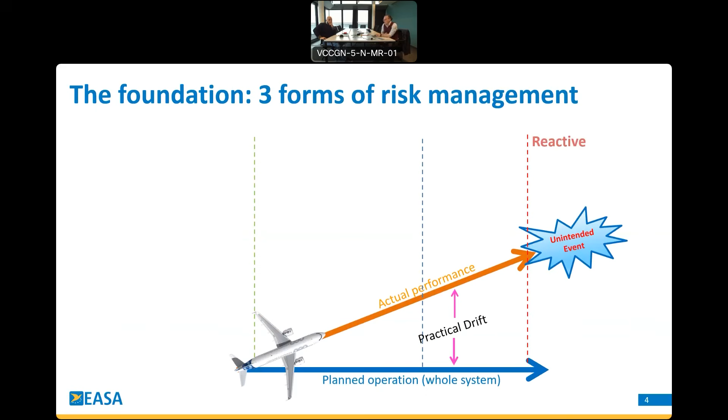One form of risk management is the reactive one. The reactive manner is to prevent reoccurrence or mitigate severity of safety events. Typically we learn after an accident, where we look at the consequences and the contributing and causal factors of the accident.

Then there is a proactive way to manage risk, where we identify hazard mechanisms and threats beforehand and establish control measures to prevent initial occurrence from happening. The third form of risk management is the predictive one, making an attempt to anticipate future exposure based on performance, data, and knowledge.

You can see, for example, the blue arrow could represent compliance-based safety, while the amber arrow, the actual performance, is the performance-based safety.

From a historical perspective, the reactive manner was the one used until the late 1940s in aviation, where we applied the principle of fly, fix, fly. The proactive manner came alive during the mid-50s, when we realized we needed better certification standards for jet aeroplanes. System safety was introduced in the late 50s and allowed two big achievements for humanity: sending man on the moon with the Mercury, Gemini, and Apollo programs, and in aviation, system safety allowed one of the best aeroplanes, the Concorde, one of the first aeroplanes to use system safety.

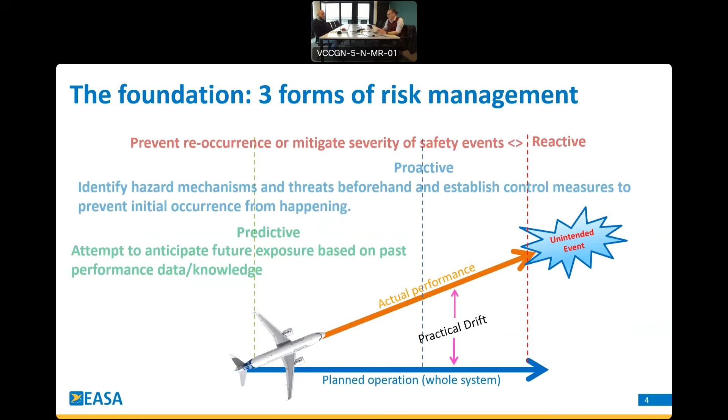You also have a very important document to implement, the AMC 20-8, currently at its latest version 20-8A. Another piece of regulation important for occurrence reporting is the 376/2014, linked to the implementing rule 2015-1018, which gives you the list of reportable occurrences. As an operator, what matters to you is Annex 1 to these implementing rules, on occurrences related to the operation of the aircraft.

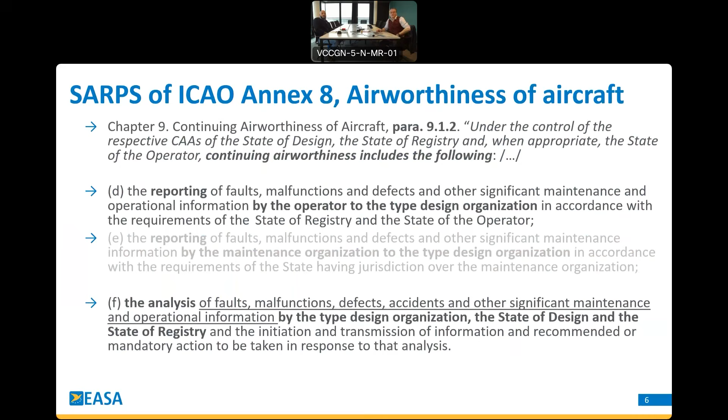Let's have an example now on the flow of reports and data reflow in the European Union. We have an important piece of the centric reporting system in Europe: the ECR, the European Central Repository.

We will be introducing EASA as competent authority number 1, an EU member state as competent authority number 2, and as an example for today, an EU Part 145 maintenance organization. We will also have a design approval holder, EASA 21J, an EASA AOC under oversight of EASA for today, and also an EASA CAMO.

So should a reportable occurrence happen, the AOC will first have to report when assessed as a reportable occurrence. It will report, because it's an EASA AOC, to its competent authority, here EASA. It will also have to liaise and report to the EASA CAMO.

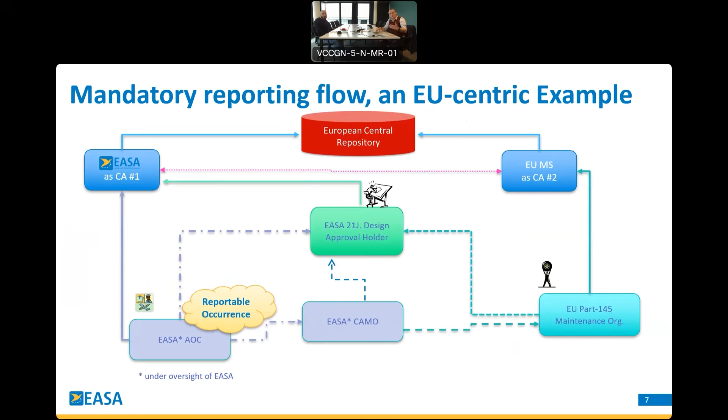Then you have a second kind of occurrences: the regulatory list-determined occurrences, which must be reported by an AOC and are related to the safety of the product or the safety of aircraft operation. Typically you will find them in the AMC 20-8, and especially, as mentioned before, in the Implementing Rule 2015-1018.

We will now enter into the detail of the first one, the operator-centric type of occurrences, and in other slides we will be dealing with and addressing the second part, the list-determined reportable occurrences. So let's start with the first one, the SMS-determined reportable occurrences.

Obviously, the SMS-determined occurrences are related to the safety of the organization. Some risk classifications permit it to be reported as closed on issue, conditional on the approved procedure and risk classification — low risk up to, let's say, marginally outside the acceptable level of safety performance.

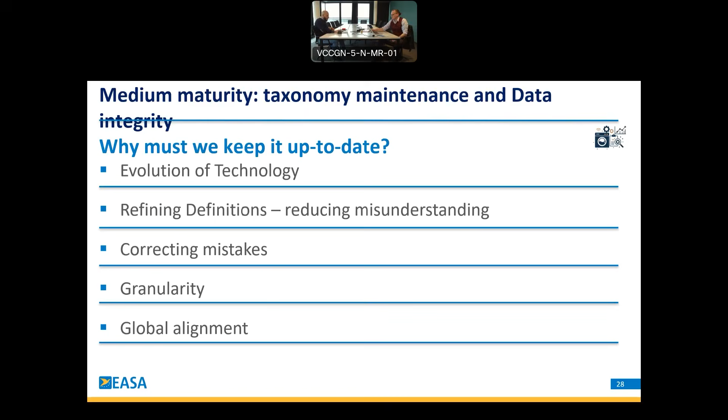So let's continue with - I talked before about defining this concept of quality control, but I know that every one of you already have, as I said before, its own concept of it. But sometimes I find it powerful to write something down, even if I already know, and to see what I wrote down. This gives me the power of keeping that knowledge vivid in my mind. So it's exactly what I want to do here.

Quality control is important for the trust we have in our data, in our database. That is really important because you as an analyst, or any analyst, wish just to perform a query, hit enter, and extract the data - exactly the data needed. But how many of you, after performing this query, start to doubt the result you receive? And the first thing you do is end up on the data, checking what you have there, and try to correct it. But this is work that is supposed to already be done.

So we have this tool, quality control, to make sure that everything we do is in compliance with the rules and definitions of our taxonomy. So it's a kind of verification activity after every time we encode a report, to ensure this is done in compliance with rules and definitions.

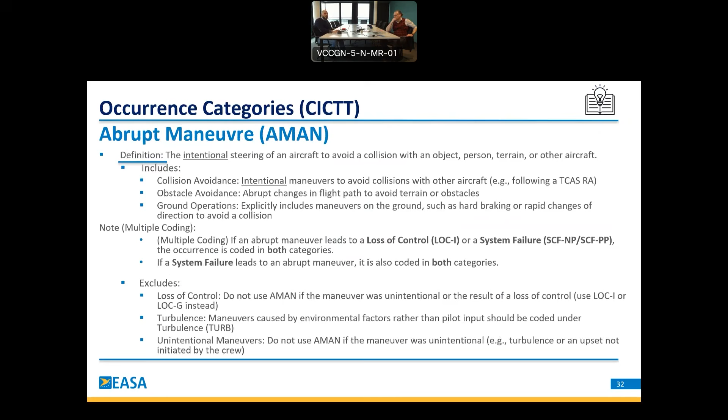So we have one of the first - these are listed in alphabetical order. We have abnormal runway contact: any landing or takeoff involving abnormal runway or landing surface contact. Then we have abrupt maneuver: when the pilot intentionally steers the aircraft to avoid a collision with an object, person, terrain, or other aircraft. Of course, later you can read through the includes and excludes, all the specific notes. Aerodrome is any occurrence that involves aerodrome design, service, or functionality issues.

Next, we have mid-air collision or near mid-air collision. These are occurrences involving in-flight aircraft collision, near collision, loss of separation, or ACAS, TCAS alerts.

ATM CNS occurrence category is occurrence involving air traffic management or communication, navigation, surveillance service issues. I want to stress here, because sometimes from what we have got reported, there is a bit of an overlap between ATM and NAV category. The NAV category we'll see in a bit, but usually this category is related to deficiency related to the ATM. If the deficiency is on the crew that didn't follow the clearance, that kind of event is coded under NAV.

Next is bird strike. This is pretty much straightforward. It's occurrence involving collision or near collision with birds.

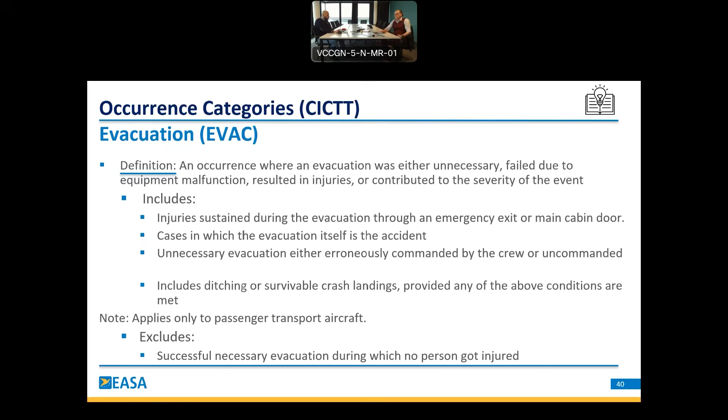Fire, smoke, non-impact. Fire or smoke in or on the aircraft, in flight or on the ground, which is not the result of an impact. This is different from the following: F-POST, fire and smoke resulting from an impact. So this is not coming after any component failure, but is a result of an impact.

Fuel-related occurrences is a loss of power in one or more engines caused by fuel exhaustion, starvation, contamination, mismanagement, or induction carburetor icing.

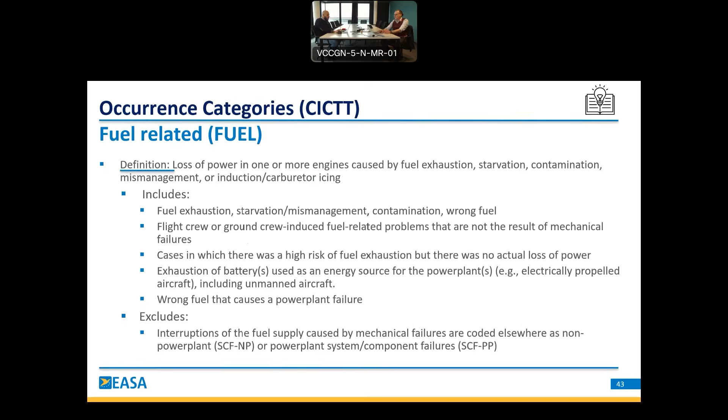Ground collision, collision while taxiing to or from a runway in use. So this is only for the taxiing phase.

Ground handling ramp is the occurrence during or as a result of ground handling operation. I want to stress this concept: ground handling can also happen during taxi, but here is where the operation is carried by the ground handling organization, while for the previous one, ground collision is when the aircraft is using its own power.

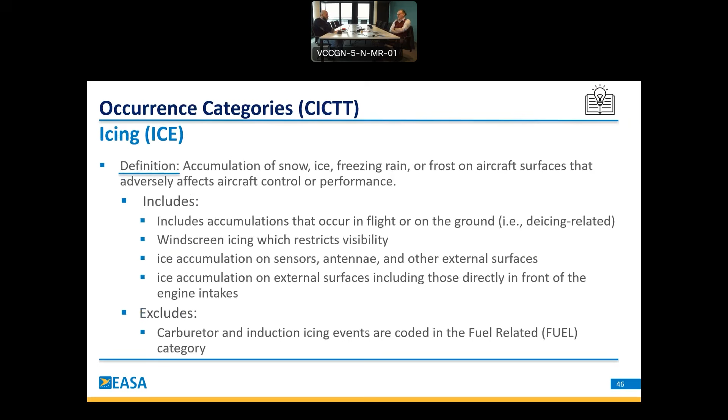So jumping to the next one, ice. This one is straightforward: accumulation of snow, ice, freezing rain, or frost on aircraft surface that adversely affects aircraft control and performance.

Loss of control on ground, so loss of control while the aircraft is on ground, straightforward, non-airborne phases.

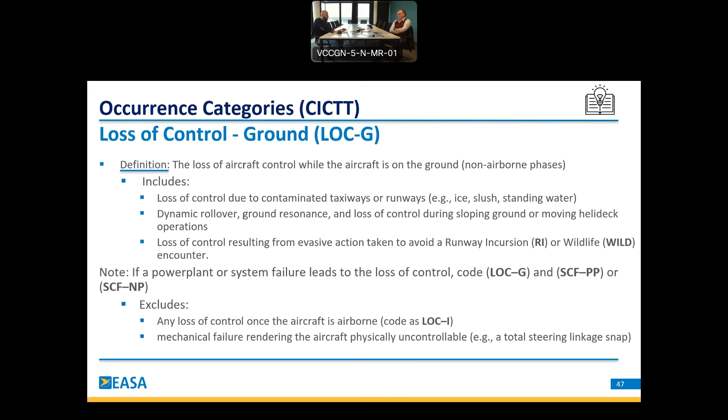Loss of control in flight is while airborne, representing an extreme manifestation of a deviation from the intended flight path.

Medical, occurrence involving illness of a person on board an aircraft. There is a note that for a medical emergency that involved a passenger, before were coded as cabin, but after October 2013, they started to be coded as medical. This is what I was saying about historical accuracy, that if something changed, then you reflect it within your database.

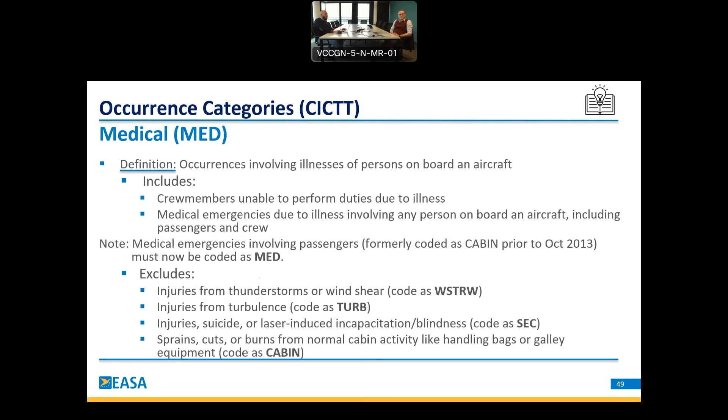Navigation error, as I introduced a bit before, occurrence involving the incorrect navigation of the aircraft on the ground or in the air. These are deviations from the crew.

Any occurrence not captured by any other category, and don't use this category in combination with any other occurrence category. So give only this category when there isn't any other that matches.

Runway excursion, straightforward, veer off of the runway, sideways or overrun.

Runway incursion, the presence of an aircraft, vehicle, or person on a protected landing or takeoff surface.

Security-related, criminal or security act which results in accident or incident. So here, if you have reported any unruly passenger report, these are classified under the security occurrence category.

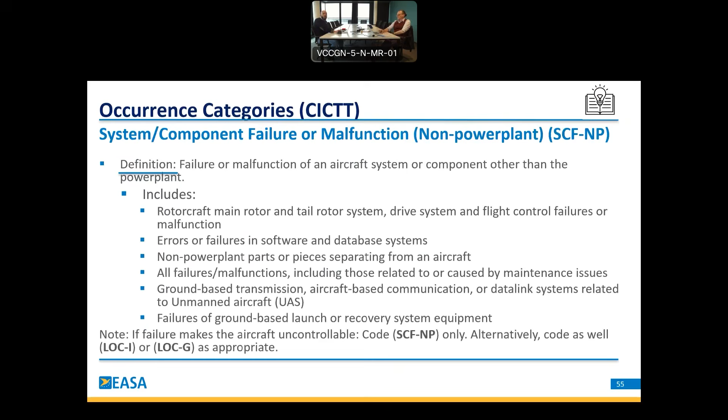System component failure, not power plant, so malfunction of aircraft system and component other than power plant. And the next one is related to components related to power plant.

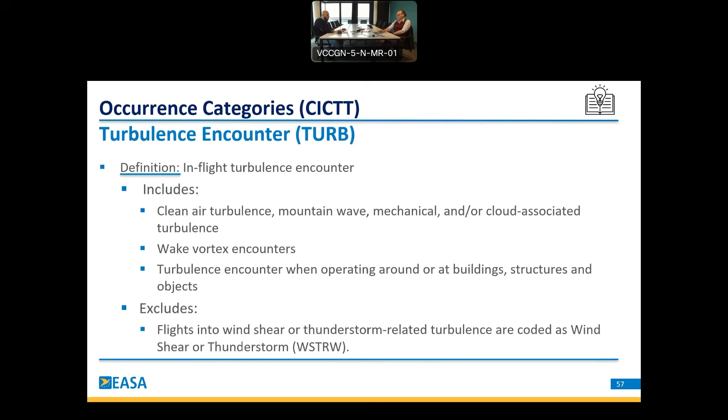Next one is turbulence, in-flight turbulence encounter, and includes clear air turbulence, wake vortex, etc. Undershoot and overshoot is a touchdown off the runway, helipad, or helideck surface.

Unknown, if you don't have enough information to classify the occurrence report, you can use this category, and also this one doesn't need to be used in combination with other categories.

Wildlife, collision with or risk of collision or evasive action taken by an aircraft to avoid wildlife on the movement area of an aerodrome or helipad, helideck in use.

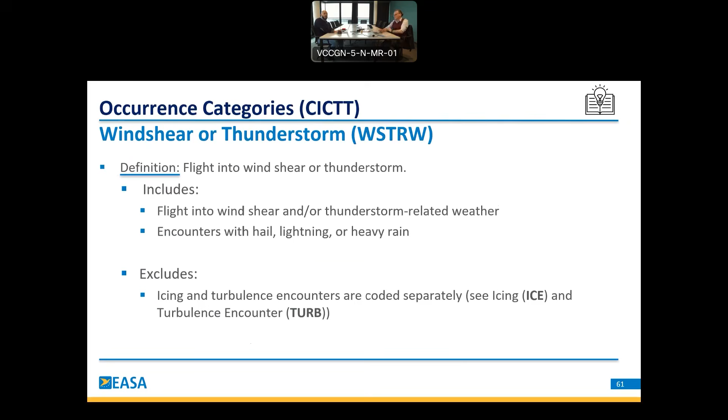Flight in the wind shear and thunderstorm is pretty straightforward. And then that's it.

So here it was just to scroll through the category, so you listen to what is there, and then you have this piece of information for your reference that you can go back to. Because the first thing is to know all the values, and then you can go in detail with the definition and rules that are specified there.

So let's move to the event type taxonomy. This was developed even before, in 1976. At the beginning there were only 88 values, and in 50 years a massive level of detail has been added. Nowadays we have over 3,000 values.

What is the aim for the event type? In the occurrence category, we stay at a high level. In the event type taxonomy is where we go deep into detail.

If we want to look at our database for something specific that happened, this is the thing that we use, event type. The purpose is to transform a narrative text that is subjective, that may have unnecessary information, and translate this piece of text into a list of event types that we are interested in. So it's like building a house, and inside it we are interested in things that are in the house. So it's thinking inside the box, but as we said before, we can always manage the taxonomy, making the box a bit bigger or a bit smaller.